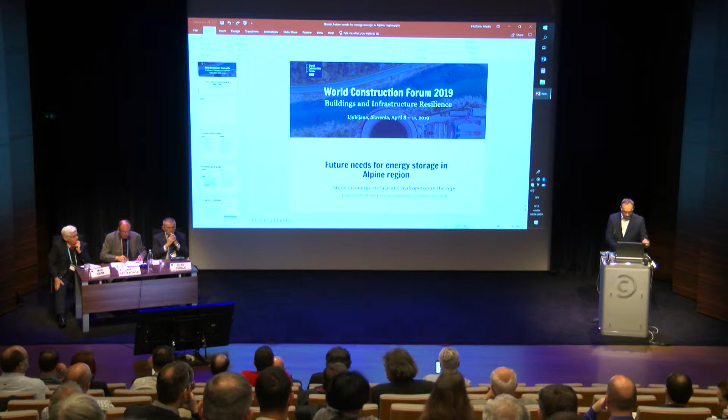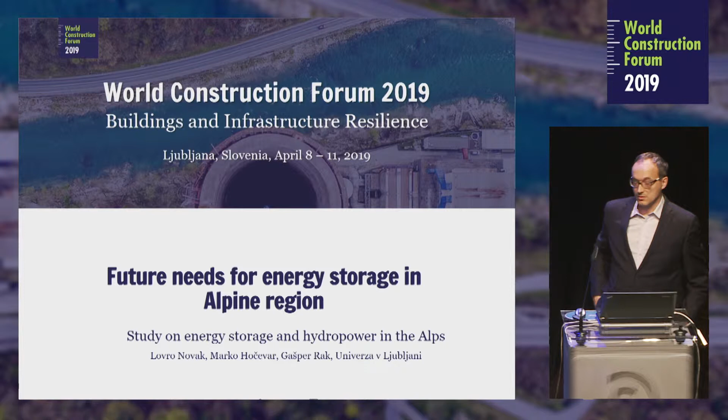So we will discuss the need for energy storage in the future. The study that we have performed was specifically targeted to the Alpine region, called EUSALP. You see it here. That's quite a large region.

So it includes Switzerland and Liechtenstein as non-EU members, then entire Austria, entire Slovenia, and then parts of Germany, France, and Italy. Po Valley, the French Alpine region, plus in Germany it includes the entire German states of Bavaria and Baden-Württemberg.

It's quite a large region. 70 million people live within, and there is a lot of economic activity and also economic growth within this region. However, because Europe has committed to significantly reduce greenhouse gas CO2 emissions, Europe has started to build capacity for renewable energy sources.

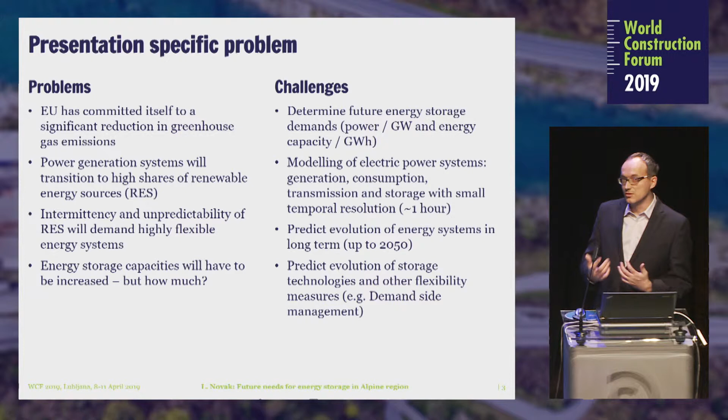So what we had to do, we had to gather data on the current power generation mix and also gather data on electricity production for all member states of the EUSALP region. That was quite a task, because the data are not statistically collected in all member states and regions in the same way.

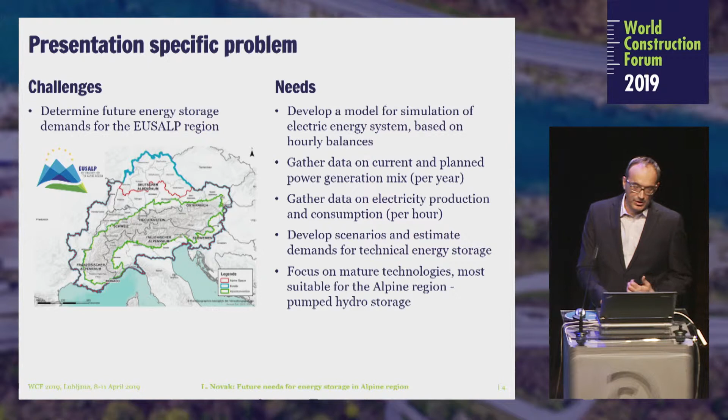What we wanted to do is to get an hourly production, and combining the hourly production in the past and the capacity will give us an idea how much pumped hydro storage or other storage technologies could contribute to the stability, efficiency, and also to the cost of electrical production.

This model was implemented as quite a large spreadsheet in Excel. So for every hour of the year here we have hourly production in wind. These are, we admit, not scenarios of each year, but they are, let's say, averages. And we know that every year is not an average, but still, we have to start with something. We did that for photovoltaic, for run-of-river, and so on.

And then at the end, we tried to match the consumption and production in the entire year, from the 1st of January till the last of December. We included electric vehicles to different extents, and then we were looking at the amount of storage that is required. Of course, amount of storage means both generating and pumping power. That means how much installed capacity we have, plus how much energy we can store.

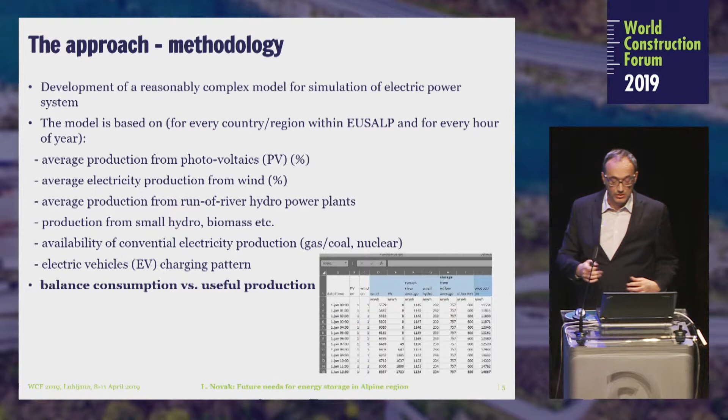That means how much is the volume of the reservoir, or even, if we would say so, you can have such batteries if you can buy them. And then we selected several scenarios. Not all will be presented here.

So the first scenario is for the evolution of photovoltaic and wind in the share. That means we take the amount of photovoltaic and the amount of wind generation, and when we talk about increase of renewable share, we maintain this share for the future up to 80% of renewables in electricity production, which, as I said, corresponds roughly to year 2050.

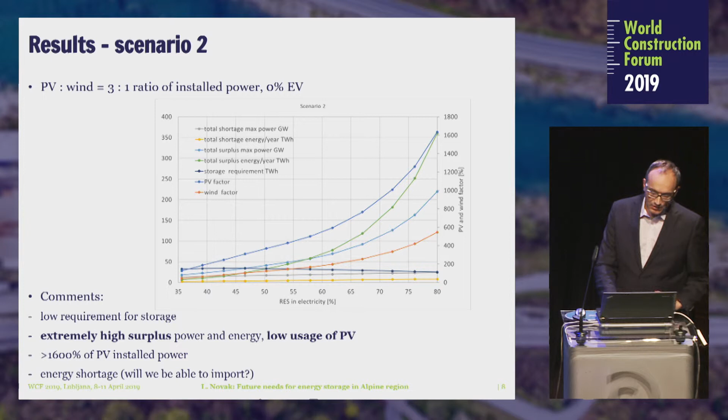And just imagine, when you already have a huge surplus of energy in summer, if you increase that by 2 times, you basically get nothing. Maybe just 10 minutes in the morning you cover, and then 10 minutes in the evening, and nothing more. So really increasing the wind and photovoltaic ratio in the energy mix will not give you the right solution for the future. We need something else, and we believe that maybe this scenario is the best to discuss.

So if we theoretically multiply pumped hydro storage in the Alpine region 10 times, we achieve that no wind or photovoltaic generation will go unused or unstored. Approximately so much pumped hydro storage must be used if we want to go to such a percentage of renewables in electricity.

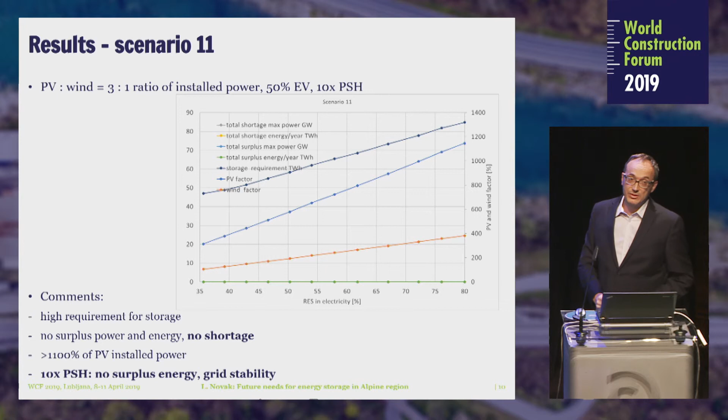We can discuss, of course, how electric vehicles will contribute to the grid, and most probably we have assumed the charging pattern a little bit wrong, and we have assumed that car batteries will improve a little bit, or that demand side management will be better. I think it will be better to some extent, and I guess that maybe instead of 10 times PSH, you will be able to just build 8 times the amount of hydro storage, or even 6 times as much. We can discuss it.

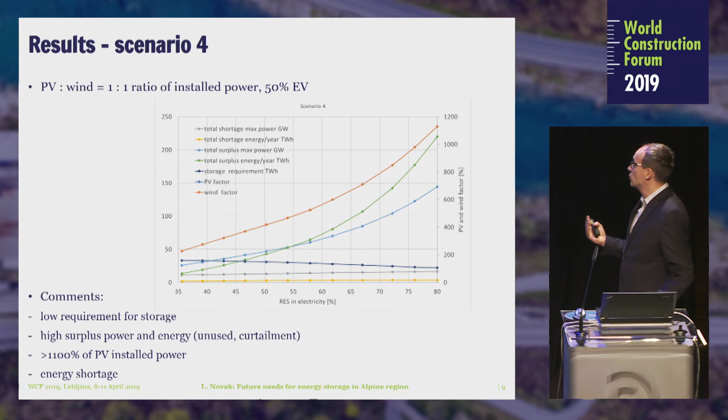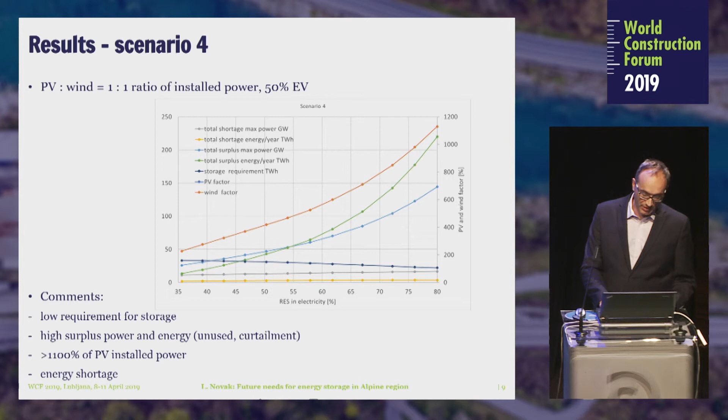But I tell you that our model tells us that without building some kind of energy storage, we will not be able, at reasonable cost, to achieve such a high percentage of renewable energy sources as we want to, or as we have written in our strategy for European development until 2050.

What do we propose? We propose that we should increase pumped hydro storage on all possible levels if we want to achieve the targets specified in the roadmap of European Union development. If we do not start today, I think the stability of the grid will be challenged. And also the cost of renewable electricity generation will increase, because our society will not be able to allow renewable energy sources to be, let's say, masked within the total production, because at some time it will be too much and it will exceed the current absorbing capacity of other power plants in the grid itself.

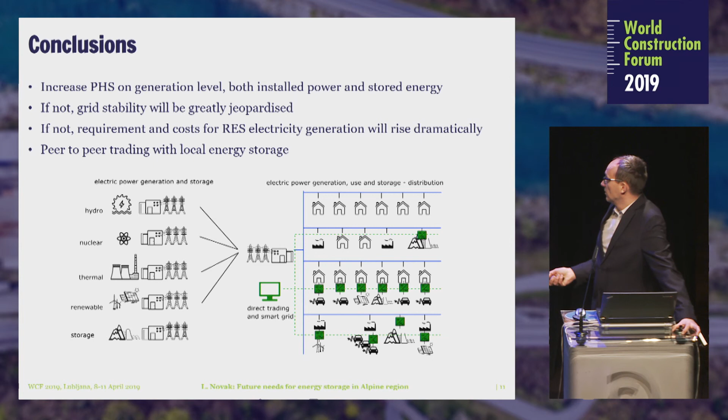What we also think is that we should make some kind of smart grid or direct trading, if we can call it so, on the very regional level of a village, for instance.

Okay, that leads us to the conclusion. As the concluding sentence, I would like to tell you that energy storage capabilities will have to be increased significantly if we want to achieve the targets of the European Union in renewable energy sources up to 2050.